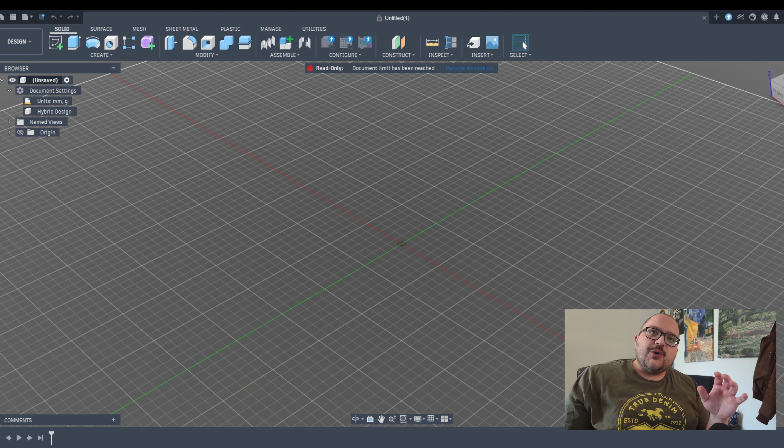Good afternoon, guys. Today I'm going to be designing with you, in less than 20 minutes, a simple gift for Mother's Day. It's coming right up.

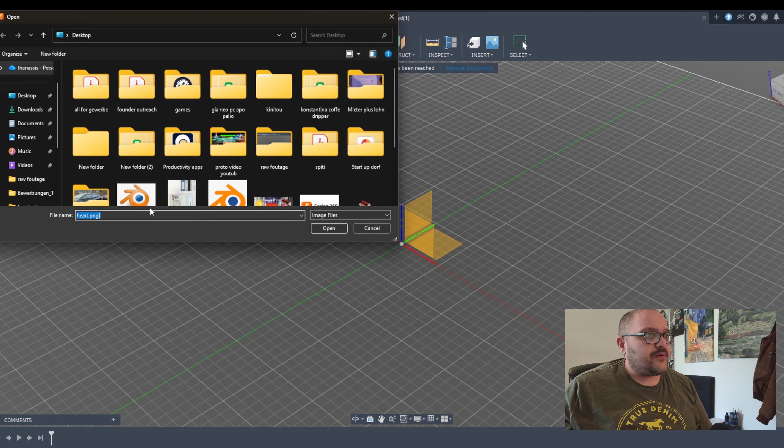So let's first insert a canvas, insert from our computer. I've already downloaded the heart I'm going to be using as a canvas, a heart PNG, and you're going to be inserting that one. You don't really need a canvas for such a simple shape, but why not make it easier for us?

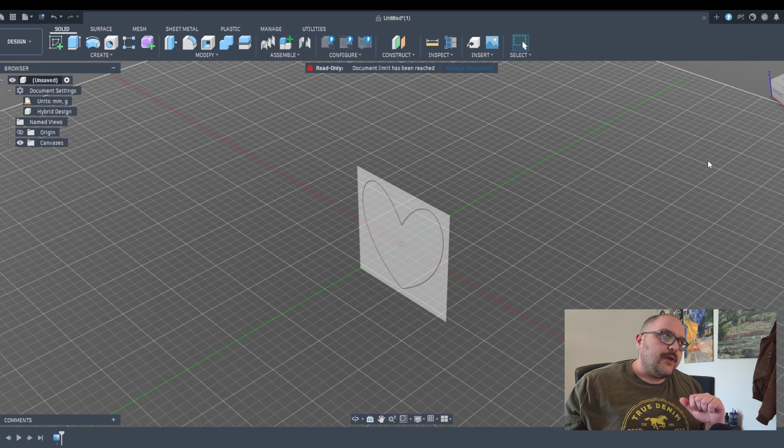A canvas is very useful if you want to recreate faces or other organic shapes and want to be extremely precise. So we're going to create a sketch on a plane parallel to our canvas, and then use our control point spline to create a spline and an actual sketch face. Let me do this rapidly for you guys.

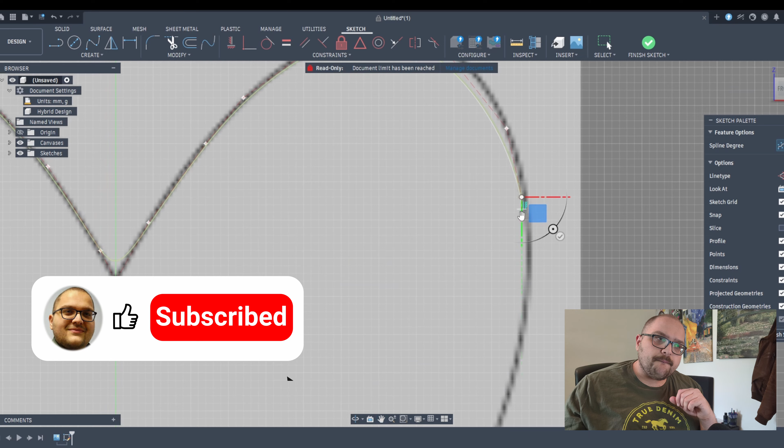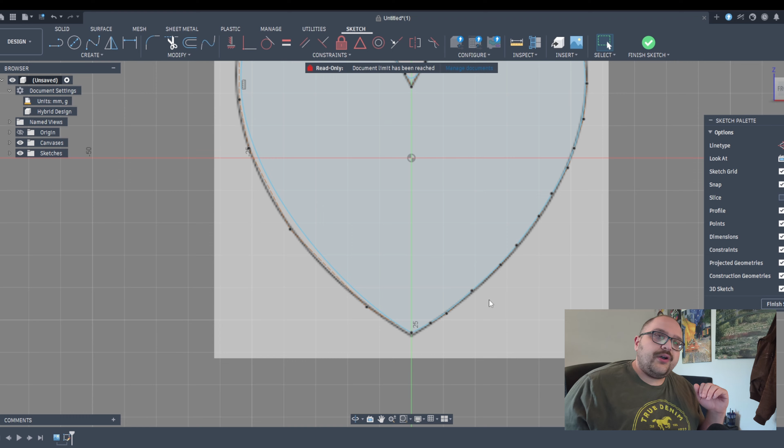So you've seen we can create the spline tool extremely fast. Now why do we use control points? Because you can pull and push control points to correct the line, and you use more control points whenever the curvature changes rapidly, whether increasing or decreasing. When it changes rapidly, use more control points; when it's a gradual change, use less. So in the bottom part of the heart we are more gradual, and the top part has to be a little more intensive.

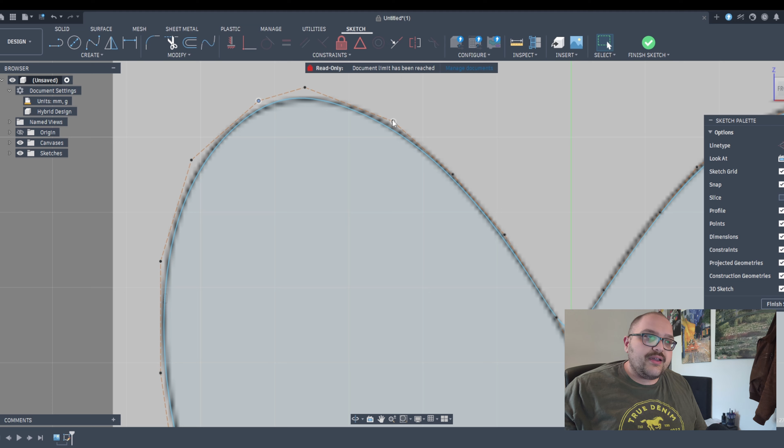So we go here into our sketch. We can easily pull out certain points to correct them, to have our sketch line trace almost perfectly onto the actual underlying canvas. But a lot of those things get significantly more intensive or complicated if you work to recreate faces. Faces are extremely complicated, by the way - this is probably the most useful technique for faces. But generally speaking, if you want to correct small things, this is a good place to start.

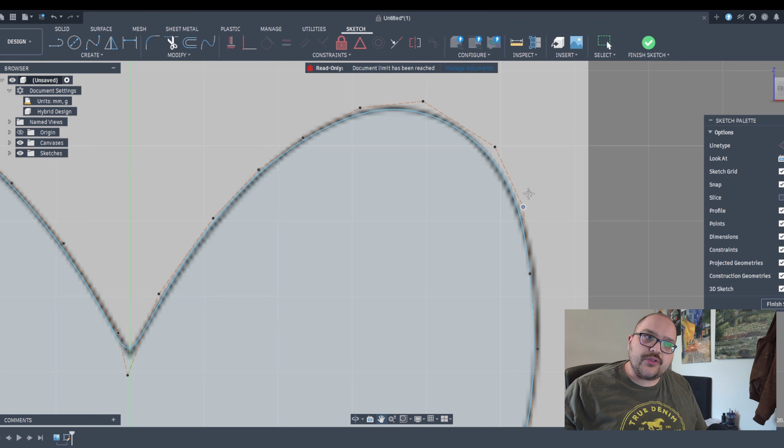Now, this again I would not recommend if you have extremely high dimensional constraints. If you really want certain distances to reach certain points, this is not a good enough method, because quite frankly this method involves a lot of eyeballing it, and it's never a good idea to eyeball so many things if you have extreme mechanical expectations.

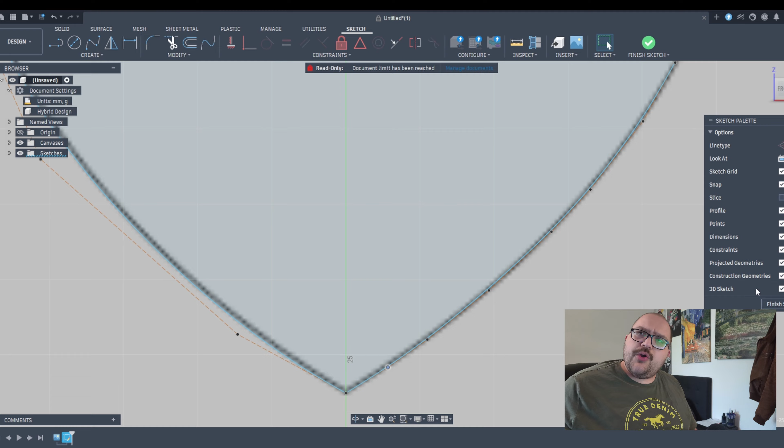So we are good right here. We finish the sketch, we can shut down the canvas, and now we go into extruding symmetrical - I want symmetrical to keep everything in the middle - and I'm just going to put, let's say, 60 millimeters.

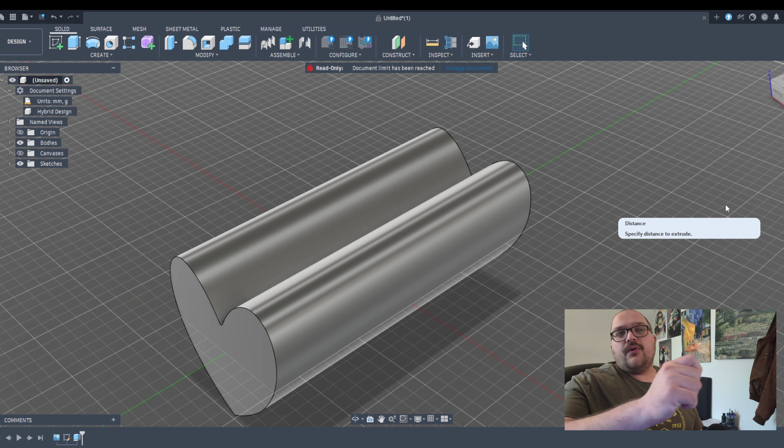Should be fine. Now I would love for it to open from the top, and have a small container compartment inside. So how do you do this? You create an offset plane, push the offset plane a little bit over your item, and then create a sketch - this time using the ellipse tool.

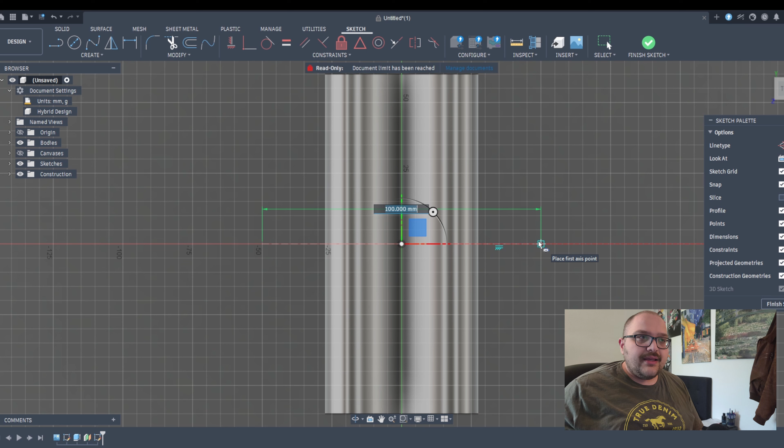So I'm putting the middle where the middle of my item is - that's why I wanted the middle point. I'm going to put the external point, the edge, a little bit outside, and then we have to decide the thickness of the distance. Now I would put 40... actually 35 looks a little bit better, because I want it to be somewhat thicker in the middle and taper inwards as it gets to the edge. So you use an ellipse to achieve this kind of finish.

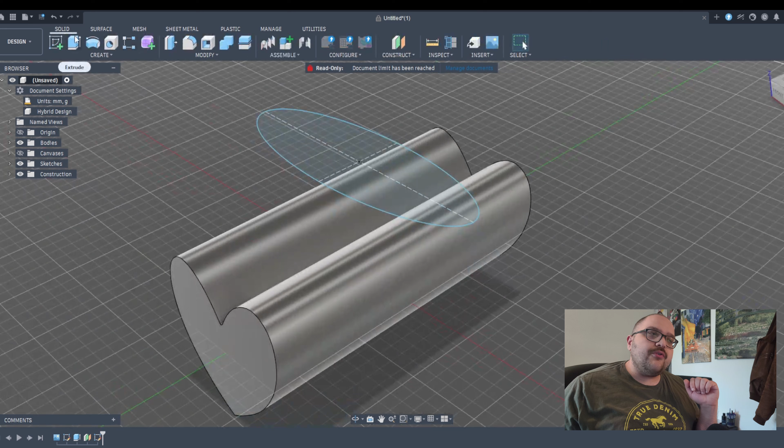So we finish the sketch here, and then go into the extrude. But if you extrude simply like that, you're going to get a cut operation instantly. We don't want that - what we want is the intersect operation, which allows us to only retain what's in the intersection between our design and the body. So we've already arrived at a very good place.

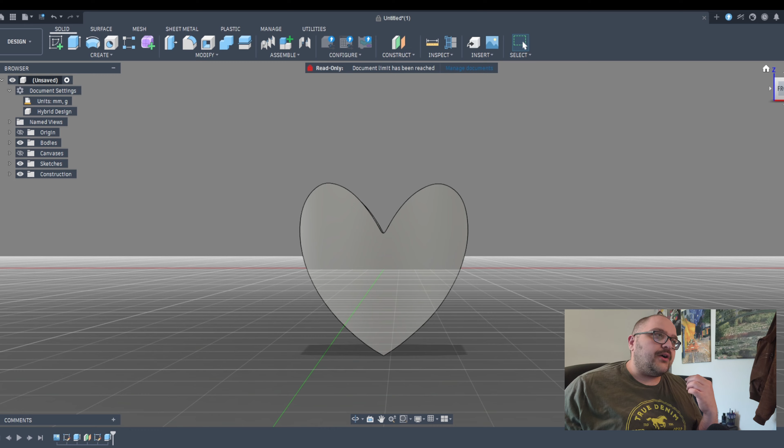Very cool. We've arrived at already a very nice point - the heart looks fantastic. So I would like to do a little bit of a fillet operation just to make it appear somewhat prettier, a little fillet just to remove all those really aggressive edges.

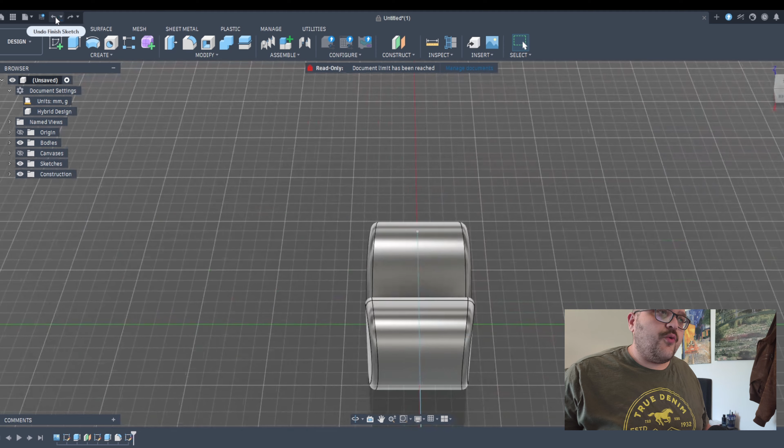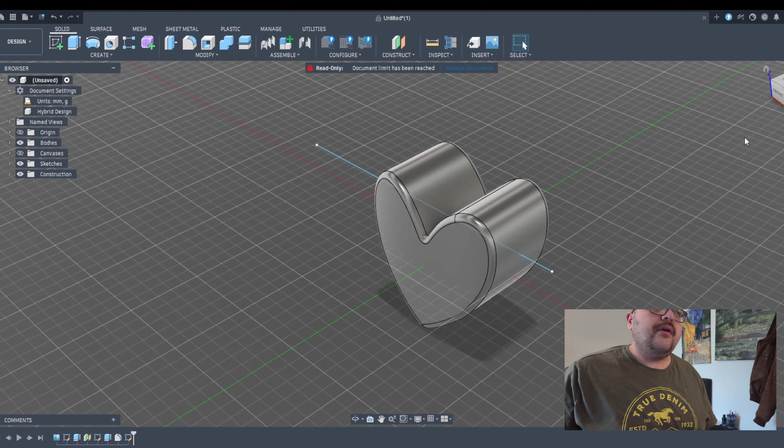So what's the next step? We've created a very perfect body, but now I would like to split. So what do we do? We use a line, go under the trough, and create a very simple line that goes just under the trough. We finish the sketch, and now we have a line and the body, so we can do an operation - a split body operation. We choose our body, we choose our line tool, and voila - you've got right now two bodies that are separate, which allow you to build your box.

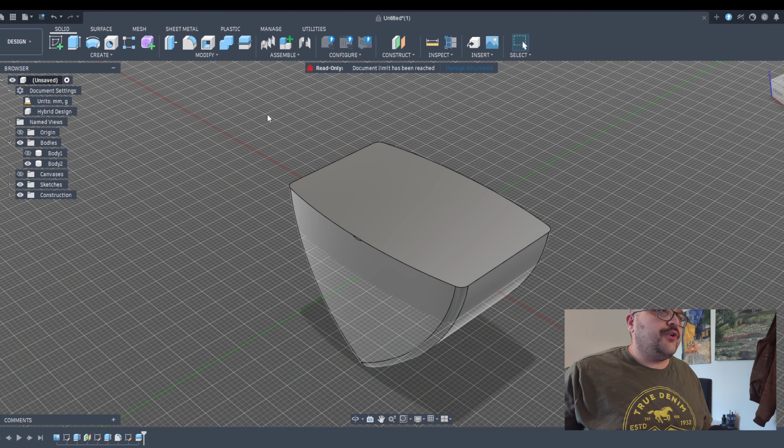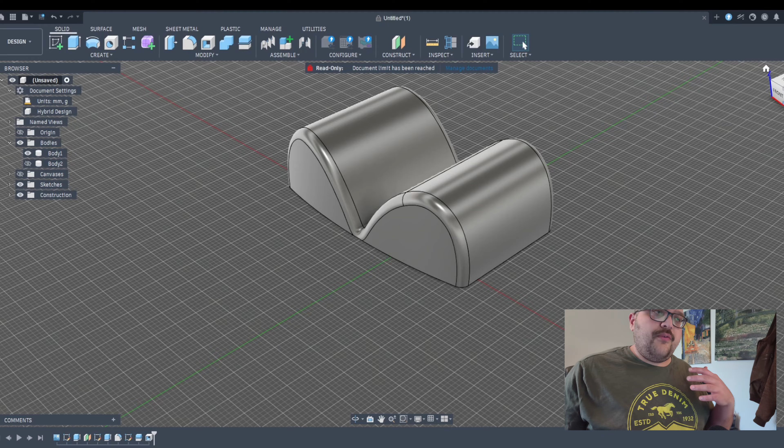So what do we do next? A box has to have an internal cavity, obviously. So you use your shell tool, use the rounded shell type, and put - this is going to be your wall thickness - let's say 2 millimeters. It's robust enough, but leaves enough space for us to actually store something if it's going to be even remotely used. So we do the same thing for the lid, to maximize internal space and minimize the expenditure of material, and we are already in a very, very nice place.

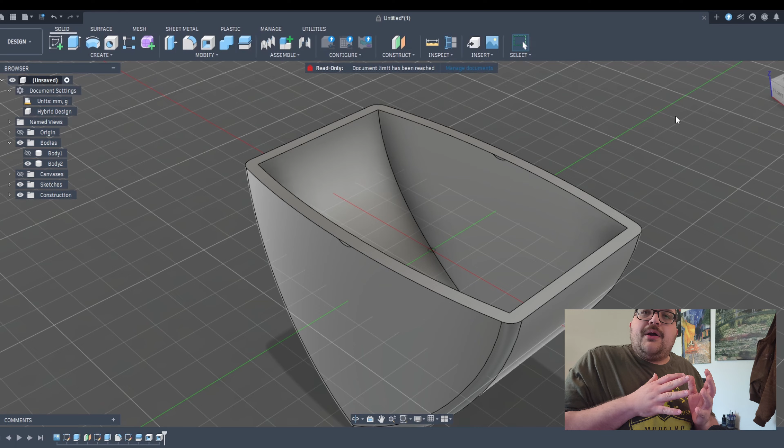Now we go once again to our body, and this lid, the way it's made, is going to be sitting atop the lower part of the heart. We don't want that because we don't want it to move or fall off. So we have to build a lip.

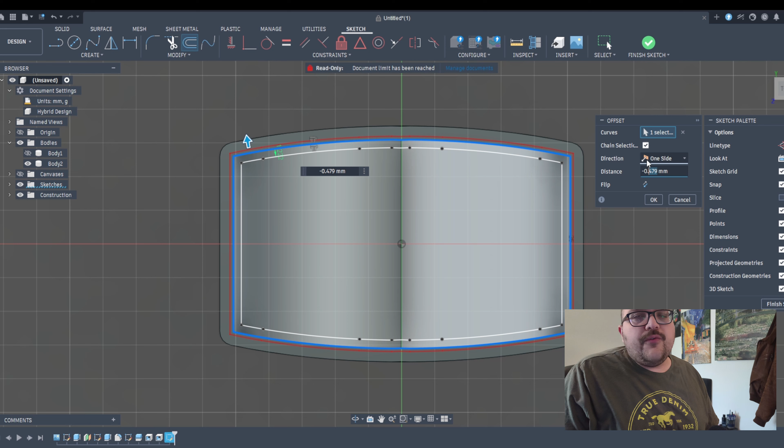So how do we achieve this? We create a sketch based on the face that's the cut face created by our cutting tool, and we use our offset tool. We choose the inner lip, pull a small lip, it doesn't matter how far, and then pull one and make it somewhat more inside. This one I would make a multiple of our printing thickness. Printing thickness is 0.42, so I'm going to put it at 0.84, twice the thickness.

Why did I do this? Because we have internal curvature. If we were to just create one offset area and use this new sketch created by the boundaries of our body and our new sketch, it could create certain anomalies which wouldn't allow us to create a nice lid. There would be points in the curvature either over the lid or the box, or it would be further from the point we are doing the extrusion, creating an uneven lid.

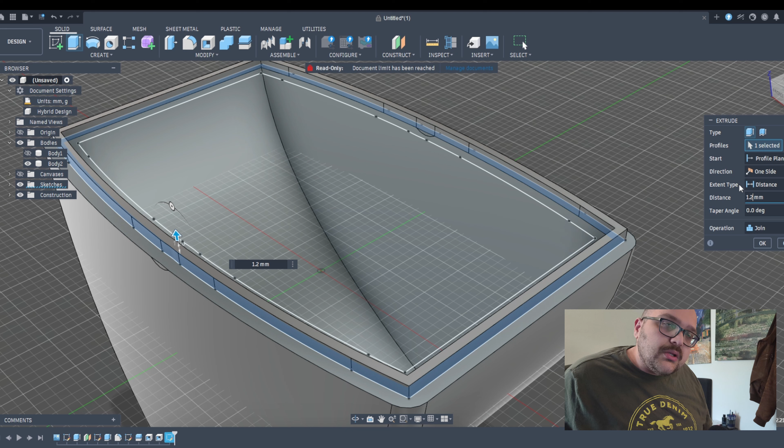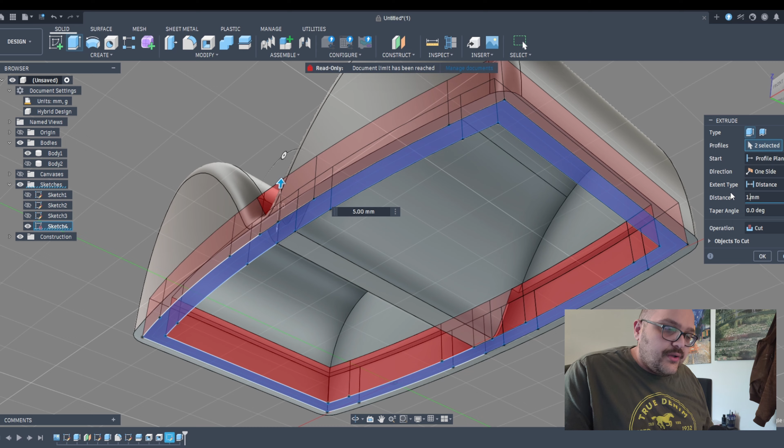So we pull this one upwards. Let's say 5 is a little bit too much, 1.2 - again a multiple of our printing depth. Then we open up this one and our last sketch. This time we're going to use both of those areas, extruding them 1.2 millimeters to create the indentation in which our lid is going to sit.

Generally speaking we are almost finished, but I would like to add a couple more things that are personalizations.

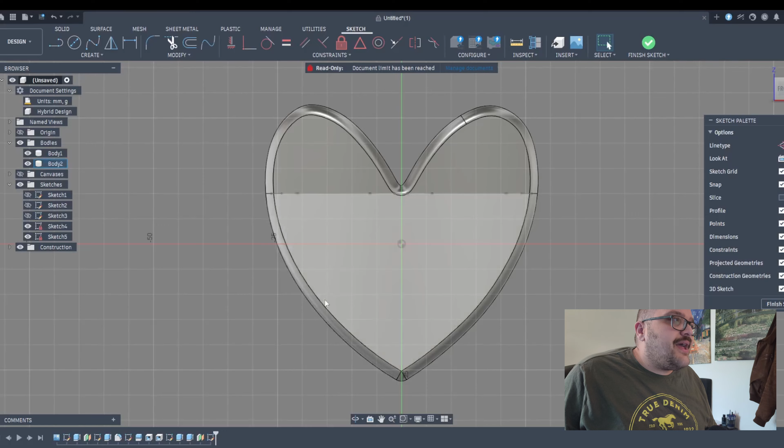We're going to be creating an offset plane, pulling it as far away from our body as possible, and then creating a sketch on that offset plane. Then I'm going to create a conic curve. Let me put it right here, just create a small curvature, and this is, once again, a tool.

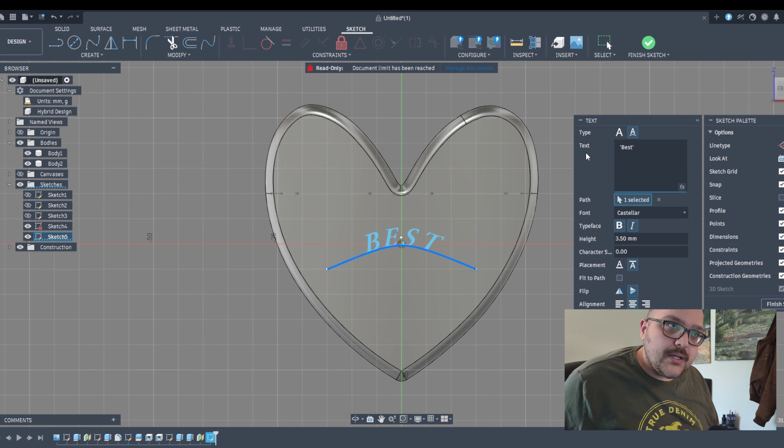Then I'm going to create a text on path, and the path is going to be the line tool. So I'm going to put the message 'best mom'. I've already pre-selected Castellar as a font, but you could select others. Cooper Black is also very nice, and I'll probably choose Cooper and make the height of the character significantly bigger.

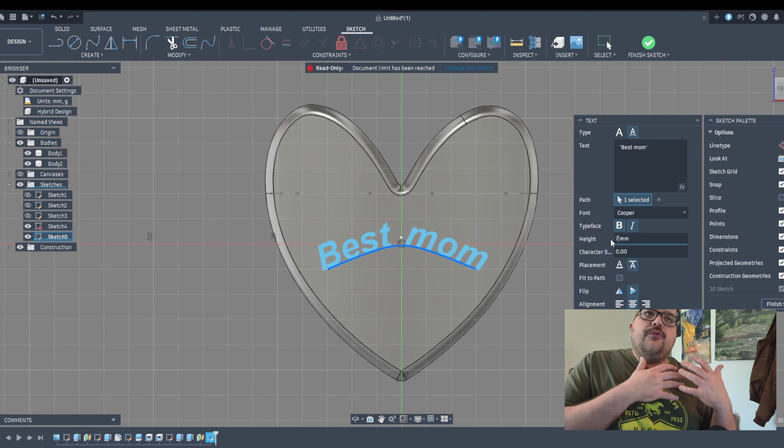The reason is simple: when you are embossing or debossing or creating fine details, if the details are very fine they may not print. So you want the actual font and typeface to be appropriately thick for your nozzle. I'm using a 0.4 nozzle, so it has to be somewhat thick.

Now, be very careful - choose your placement above or below, and your flip is going to determine how it's going to be read. So we are good where we are. I press OK, finish my sketch.

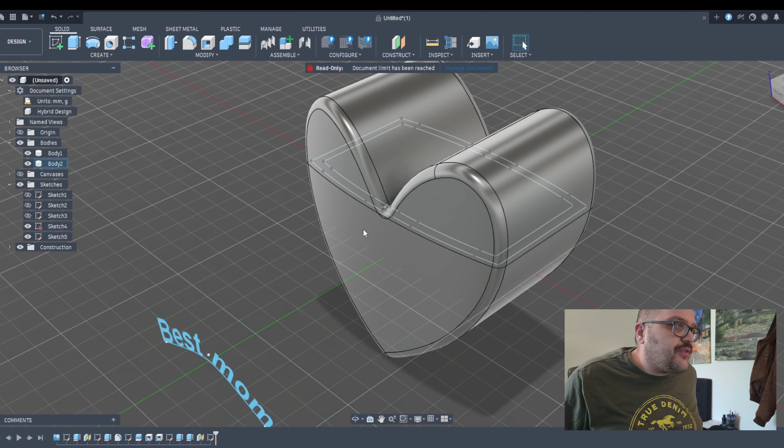Now I have to enable seeing my sketches - this one I don't care about. Then you're going to use your emboss command. Once again, choose your sketch, choose your face, choose deboss, and a depth of 0.5 I think is actually pretty perfect. Let me do that - and we are 90% finished.

We could leave it as it is, but if we were to create this one, there is a problem - it cannot sit. So we have to do some corrections.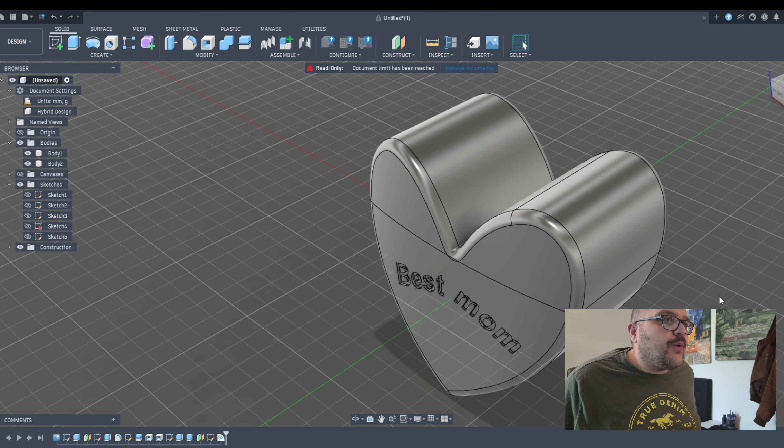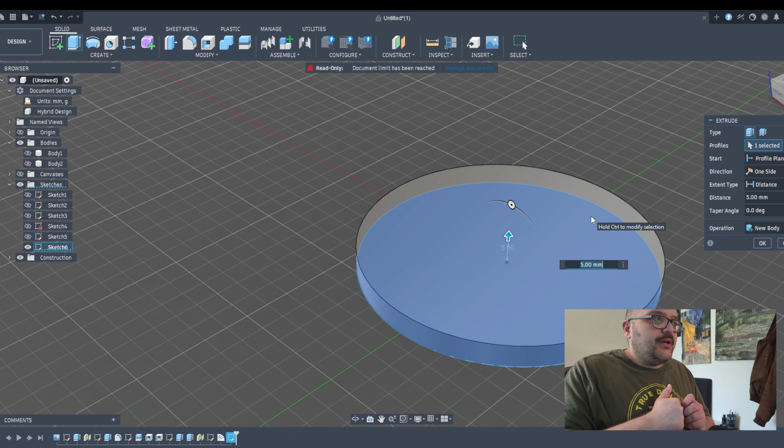So what do we do? We create, first of all, a circle which is going to be the base. I'm gonna finish this one, and then I'm just gonna create a new body this time - no cutting, just a new body. Just to make it easier for us, we'll make the other two not obvious. And I would like to make it, let's say, 10 millimeters in height.

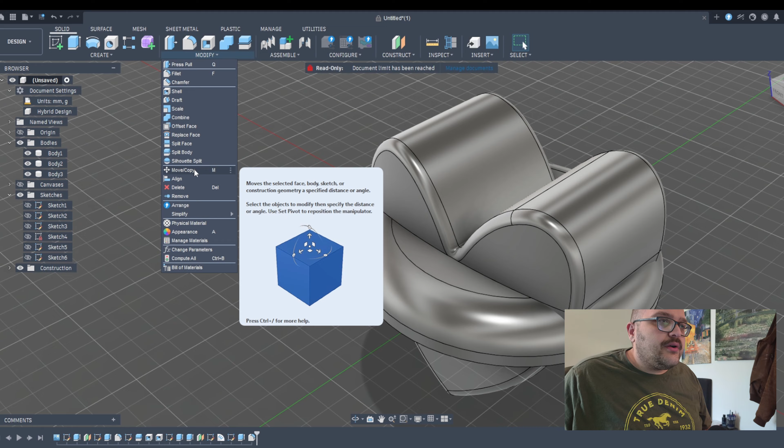I will do a fillet just to make it almost like a base perfectly. Now we open this once, and then I have to move my base lower. This is about perfect, I think, and this is a very, very nice gift.

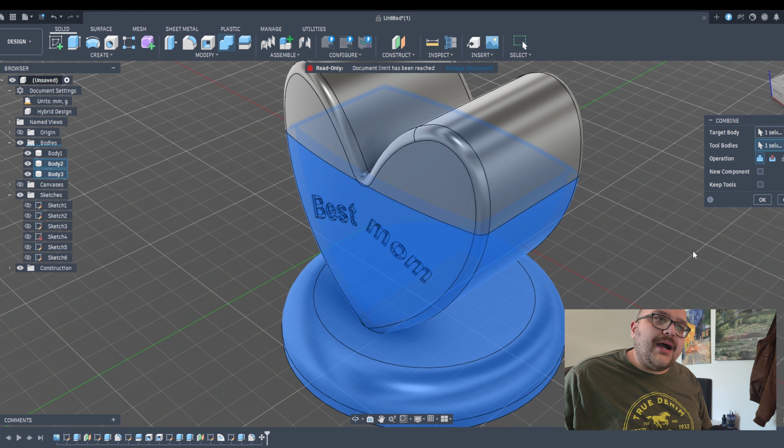Now, if you were to export them, it would be three different things - you don't have to do that. What you can do is use your combine: you pick the lower body, you pick the base, you combine them, and now you have two bodies - this one, which is your lower half with your base, and the top one, which is going to be the cap. So this is it.

We are done. If you forgot your mother - you shouldn't - and you have a 3D printer, you can just create a personalized gift extremely fast. I'm probably less than 20 minutes here.